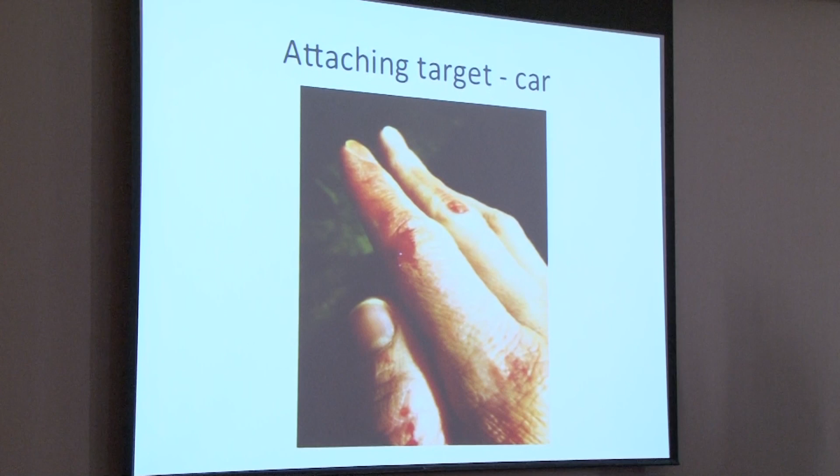Attaching to a target with regular software is just as easy as sipping drinks in a cabana in Las Vegas. Attaching to a car ends up being a bit harder, and you end up bleeding from your hands a lot, it seems. Yeah, especially us, because we're used to typing and not used to manual work. I'm not very good at mechanics work, so I was always busting my knuckles off bolts and bleeding everywhere all the time.

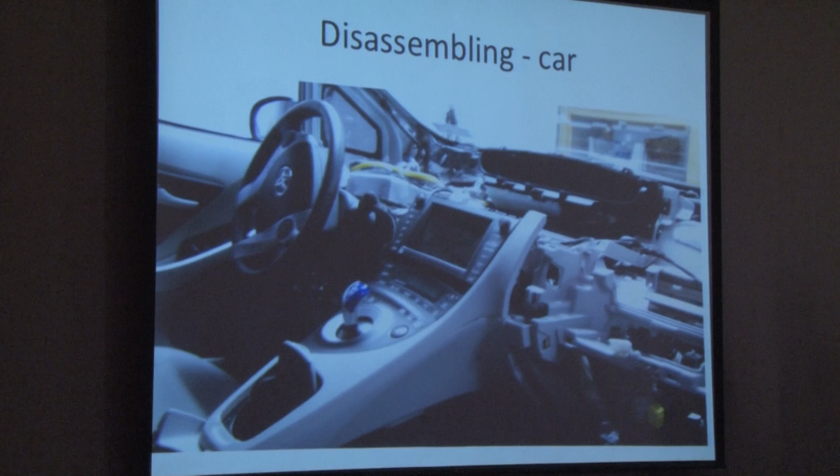Disassembly - there's probably a lot of people in this room familiar with reading disassemblies of computer programs. You're looking at code, you generally have an idea of where an entry point would be. Cars, on the other hand, require a bit more disassembly. We wanted to physically locate computers, so that involved ripping the car up. We both had accounts on mechanics websites for Ford and Toyota, respectively, and they would say things like here's 28 steps to remove the dashboard of the car. And I was like, crowbar, and just ripped it right off. Just pried it and ruined it because I didn't care. We weren't going to be using these cars when we were done, so we didn't really care if we damaged them.

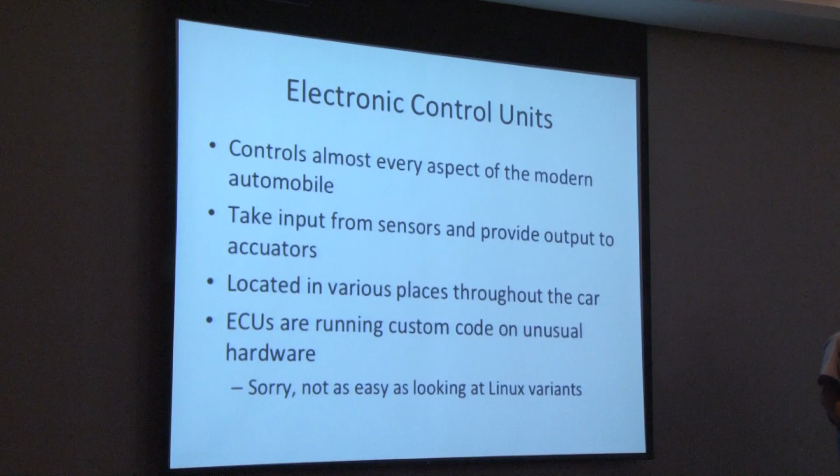The first thing I think we need to talk about are things called ECUs, or electronic control units. These little computers really tend to control every aspect of the automobile, from the odometer readings to acceleration to braking to sometimes steering. Auto manufacturers have realized that building these individual computers and putting them in the car and writing software to do what they want is a lot more cost effective than having all the wires and all the linkage and everything hooked up, right?

So they basically take input from sensors and then use things called actuators to perform physical actions, right? You could hear in Charlie's video when he was auto parking, you heard a beeping noise. That was a sensor saying he was getting close to the car behind him. And those are what these ECUs kind of do, and they're placed various places throughout the automobile.

Usually the first thing people ask is, what operating system are these things running? And they're really not running a traditional operating system. It's not just some Linux variant. They're running custom code on a specific chip that really doesn't have much functionality other than performing its job.

For example, there was an ECU in the Prius that was solely responsible for tightening the seatbelts in the case that you were to be in a collision. So imagine there's not much code on this device, right? Because all it does is get a signal, tighten the seatbelt. That's really all these things do. While the engine control is very sophisticated, there are ones for simple things.

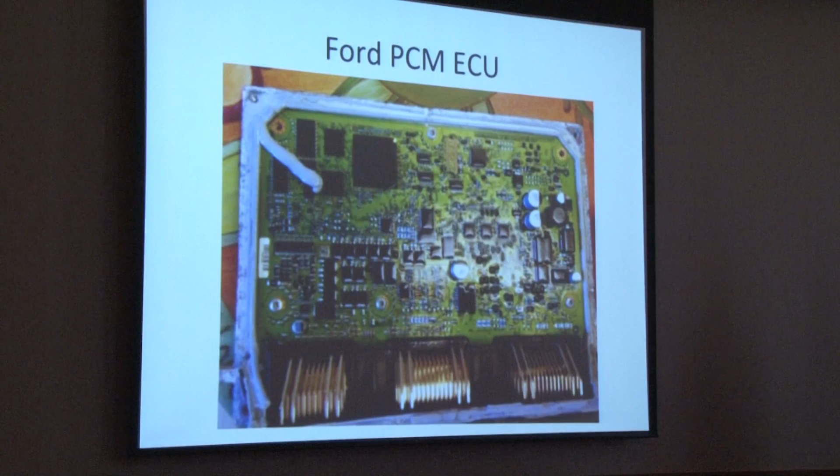Yeah, so if you want to see what one of these ECUs looks like, this is the powertrain control module for the Ford, basically the one that controls the engine. And so this is what it looks like under the hood. It's just like a ton of wires that go into it. If you rip it out, it looks like this. So you can see there's like a chip and like a bunch of memory and a bunch of other stuff. But yeah, it's just an embedded device basically that has a bunch of inputs, one of which is the CAN network.

So we were only interested in CAN. We're aware that there are other types of networks in automobiles, such as FlexRay and LIN and other things. So I think Ethernet is even becoming popular. But we wanted to look at CAN because we figured it was our best chance to see how the car's networks work. And CAN is generally in every car, at least in America.

The IDs can be 11 or 29 bits in length. We only saw 11-bit IDs on our car, and that seems to be the most common way. So instead of having an address, the ID is used kind of as a priority function, which the lower IDs are the greater priority. So the message with the highest priority in the car would be ID 0, and they contain varying amounts of data.

So really, there's no addressing. It kind of just spits this message out on the network, and the ECUs on the network look at the ID, and if it's an ID that they want as input, they take the message and digest the data that's available with it. So it's really quite simple.

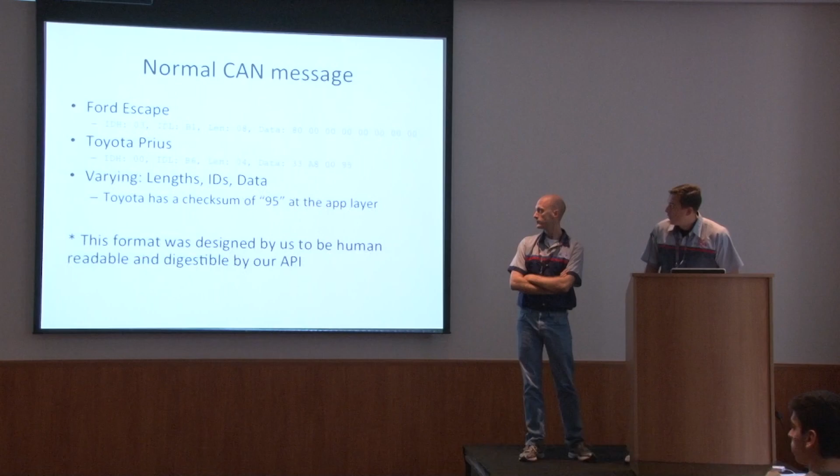These are example messages, the first being from the Ford Escape. This data format was invented by Charlie and I just to be human readable and digestible by our API. This isn't some standard definition. As you can see here, there's one message that has an ID, a combined ID of 03B1 and a length of 8, followed by 8 bytes of data.

While the Prius has another message, this one is 00B6 - I remember this one, it's for the speed of the automobile. It has a length of 4, and then 4 bytes of data. In the Toyota, it was very common for the last data byte to be a checksum. So that 95 is a checksum of the IDH plus IDL plus length plus the first 3 bytes of data.

So these messages are constantly being put out onto the network. They don't occur when something happens. The data bytes will change when certain events happen, but generally speaking, you'll see the message being spit out at a constant rate. And the 8 bytes is the most that a message can have - the 8 byte is the biggest.

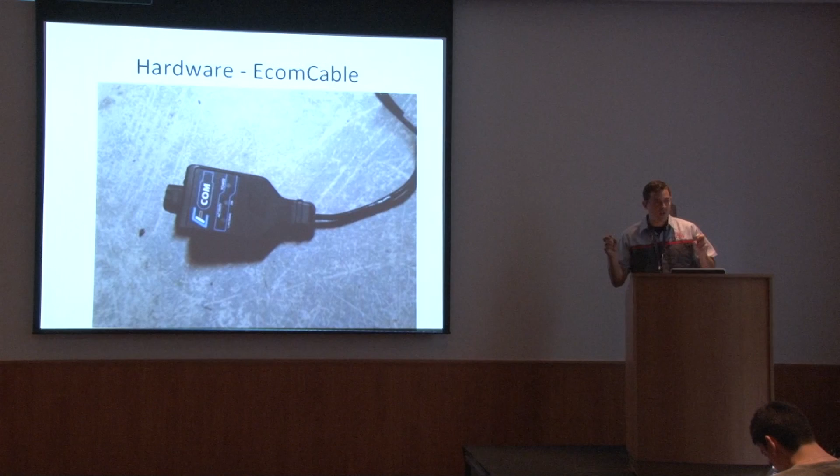The first thing we used is a thing called an ECOM cable. You can buy the regular cable for about $150 US, or a special Mechanics Edition for $1,200. We'd recommend not buying the Mechanics Edition, because if you look at the wiring diagram, you can snip a few wires, buy an OBD2 shell, and put the wires in the appropriate place, and it serves the same function. The expensive one just has exposed wires, and it also comes with software, which isn't as good as what we released. So save yourself some money—just buy a regular ECOM cable, look at the wiring diagram, and our paper explains how to snip the wires and connect them to an OBD2 shell.

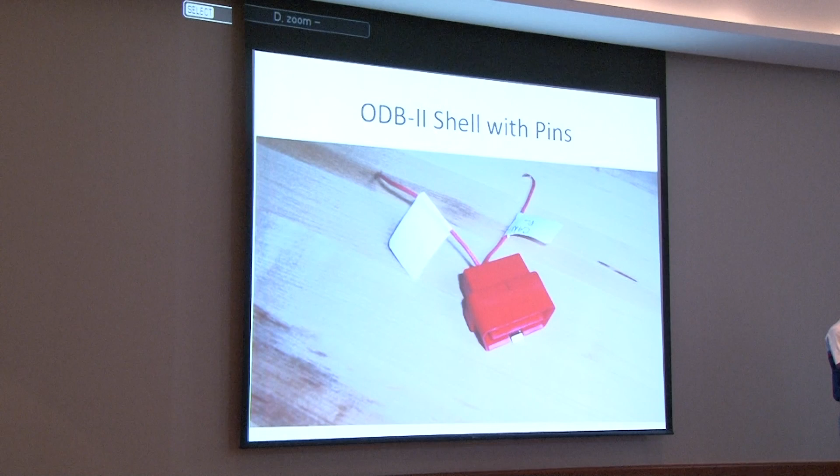If you're going to do this research, buy a lot of these—they're like 20 cents US. Basically, it's a blank shell for ODB2, and you can put metal pins where the pins are in your car. The standard pins are 6 and 14, but Charlie had pins for the Ford that were different, so he could create his own device instead of hacking up a whole big cable.

Since we showed you the hardware tools, now we'll explain the software that we wrote, which is now publicly available online. You can download it and use it yourself.

The first thing we really wrote was a tool called EcomCat. As you can probably guess, this was software that leverages the ECOM cable to read and write onto the CAN bus. It basically was our Swiss Army knife—we'd sit there and read messages on the wire, and built in functionality to send multiple messages, continuously loop messages, and filter on certain IDs. It's not very well written, I'd say, but it definitely serves the purpose and is very useful.

This is a tool we used when we wanted to figure out how parallel parking worked. Charlie and I would be out parallel parking our cars for hours on end, for a couple weeks, looking at our computer and using this software to narrow down the IDs used for the parking.

The other portion we wrote is the EcomAPI, which is basically a Python API that's quite useful and leverages a lot of the functionality of the Ecom program, which is written in C. This makes it really easy to write a 5-line script that performs some action. In our examples, we're actually using our own API to write little programs in Python to control pieces of the car.

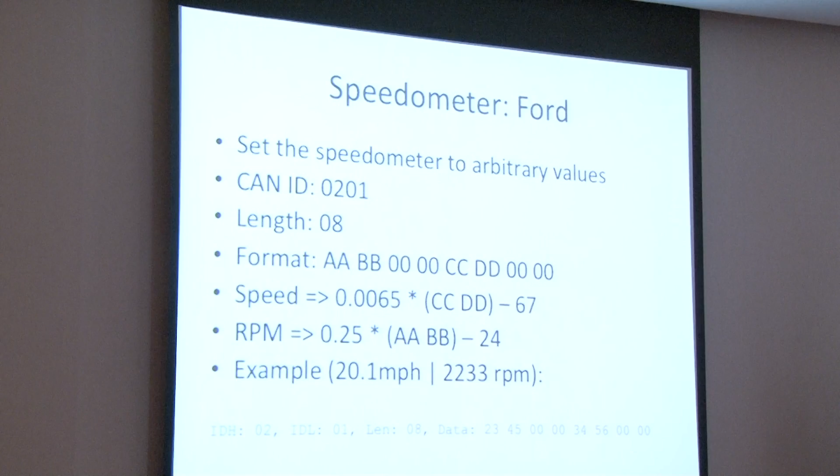So the first thing is, it's pretty simple, but people seem to think it's cool. You can control the speedometer on either car. So we'll start with the Ford one. Here, the ID you need to know is 0201. And the only way we figured that out, since that's not documented, was just trial and error. So it has 8 bytes. The format looks like this. You take your speed, you put it into that formula. You take the RPMs, plug that into the formula, and then you get the speedometer to say what you want. And if you want to see how easy it is, if you use our API, it's essentially 2 lines of Python to set the speedometer.

So here's a video. So I'm driving down the street. I'm driving quite slowly. It looks like 15 miles an hour or something. And then now it says I'm going quite fast. But I'm not actually driving quite fast. And this is obviously a closed course around Charlie's house. We're not endangering his neighbors. Yeah, this was very safe.

And then here's the same thing on the Toyota. For the Toyota, it's a different CAN ID, a different message, but it's the same idea. It's one message you play continuously. As you see, I'm sitting by my garage. I'm not moving at all. Yep, I'm definitely not moving. And then you can tell the car that it's going quite fast, 20 miles an hour, and you're not moving. So you can forge both these messages for the automobiles to trick the speedometer into thinking it's going any speed you want it to. And you'll see later why that's actually important for other types of things we wanted to do.

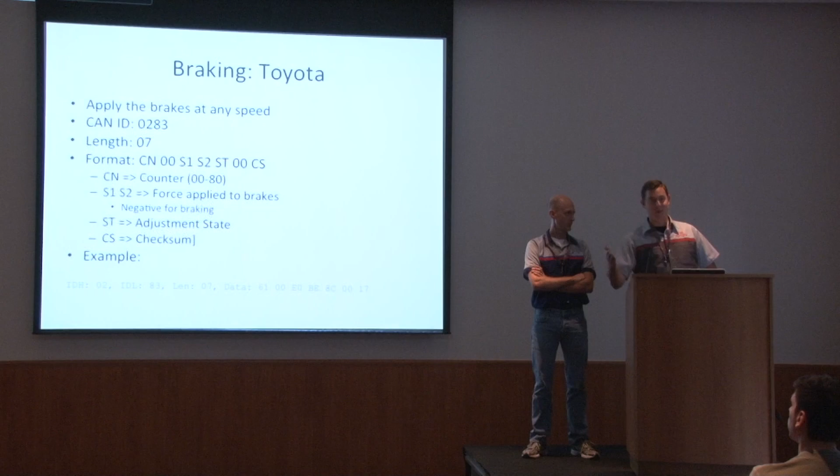For the Toyota, we wanted to be able to arbitrarily apply the brakes. And the way we did this, again, I would drive the car in cruise control really close to another car and have my sniffer hooked up, and I would see the car brake. I would record the traffic. We would sift through the messages and figure out which ones are used for automatic braking.

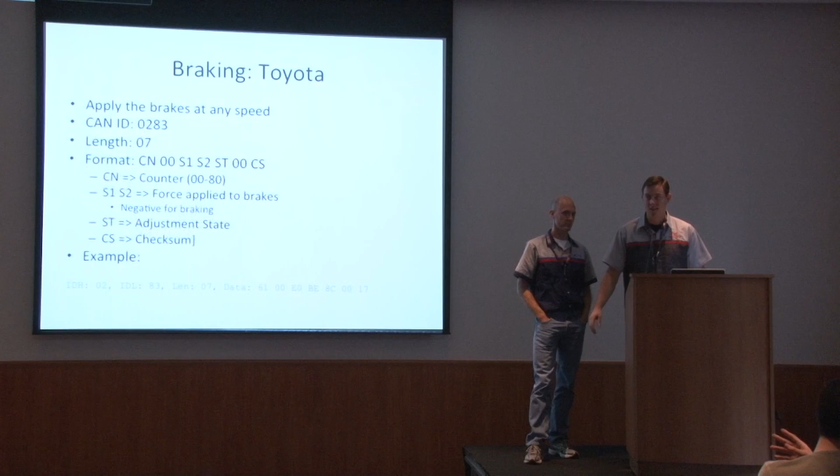Again, you kind of plug in how much force you want to apply to the brakes. Obviously we wanted to clamp them completely shut. And then there's a checksum, and then there's an adjustment state, which if you read the paper, it explains what that is.

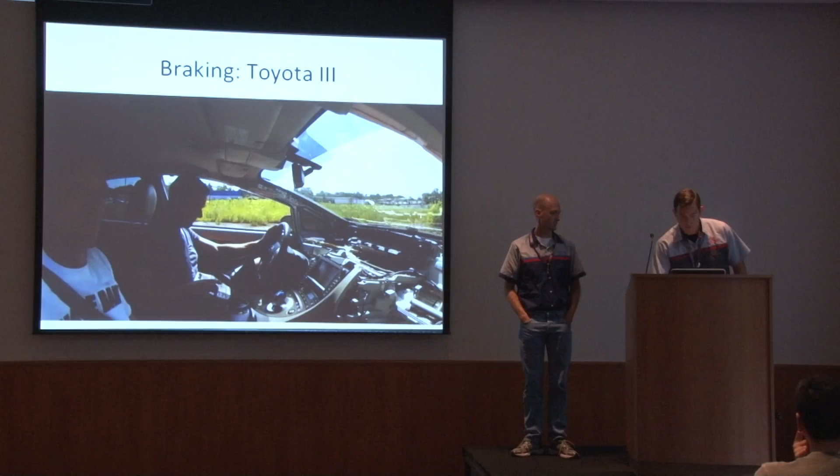Again, while this is a bunch, this is the whole program to completely lock the brakes of a 2010 Toyota Prius if it has the pre-collision system. The brakes will be applied at full force regardless of how fast you're going. You can even press the acceleration pedal the whole way down and the car won't move. So we have a video of that.

Okay. Where's the sound? Well, there's usually sound. Right, that's what it sounds like. So, yeah, that's what you generally would have heard. Let's watch it again. Okay. Did we get sound a second?

Yeah, there we go. So you can see we're driving like 40 miles an hour. I don't know what that is. And then we send the packet and we stop. That was pretty abrupt. All right.

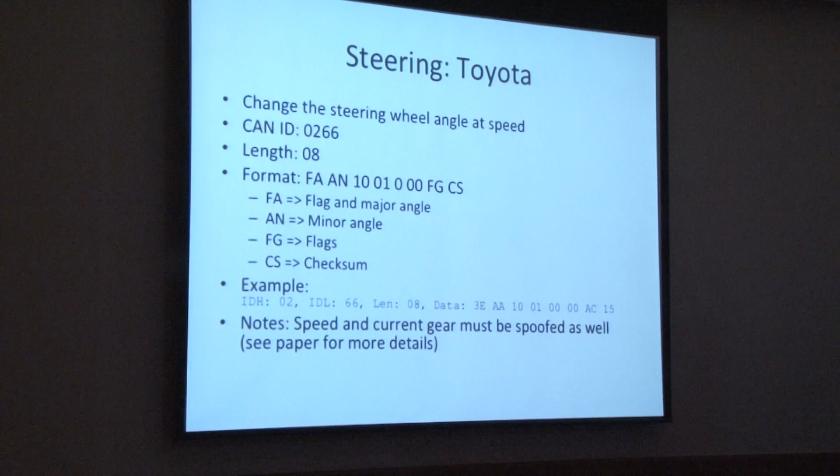Go ahead. For the Toyota, we could also control the steering. It had the lane keep assist, which was one way of controlling the steering, but it also had the intelligent park assist, parallel parking the car. Again, we just parallel parked the car with our sniffer hooked up, for hours on end trying to figure out what messages and what data corresponded to, say, the angle of the wheel, things like that. The Toyota actually had a lot of restrictions on when the wheel could turn if you were using the park assist.

You needed to be in the park assist mode, the car needed to be in reverse, and the car could not exceed more than 5 miles an hour. So at first it seemed pretty daunting, but what we did is figure out a way to trick the car. So before you saw how we set the speedometer to 20 miles an hour, this time around we gave the automotive network a speed that the car couldn't go, so no one knew what to do. From there, we told the car that it was actually in reverse when it wasn't, and that it was parallel parking itself. So by combining all the knowledge we learned about the car, we could make the wheel turn.

Again, as Charlie talked before, it's not really smooth like it would be if you were parking the car, but it really jerks the wheel out of your hands and you can definitely wreck. We just wrecked someone giving a demo last week. So yeah, there were 2 ways in the Toyota that you could turn. You could do the lane keep assist, and the safety built in there was you could only turn 5 degrees. So that's not very fun. No. And then the safety for the parallel parking was it only worked if you were slow and in reverse, and that wasn't fun. But by tricking that, we were able to get the turn.

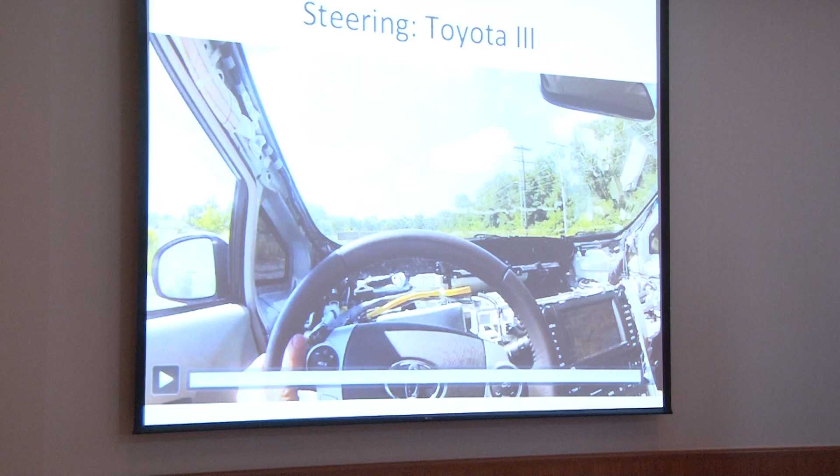So here's us driving again. So Chris is going to make the steering wheel turn to the left. So it did a little bit there, but there it did quite a bit. I was literally trying to kill Charlie the entire time. It's quite scary. So here's like if you're driving what it would look like. We almost hit a little tree on the side of the road. It always seems to turn when it senses you're going to crash. Yeah, it's really weird. Yeah. But as you see, we didn't really have full control, unfortunately, but it's definitely enough to wreck you.

Acceleration was another one of our goals, and the Prius actually had acceleration by wire. That is, it communicated on the CAN bus to a certain ECU, and that ECU kind of controlled the speed of the car. While in Charlie's car, it really didn't work that way. Again, we figured out the CAN ID that was used for acceleration. Unfortunately, for this example, we couldn't be in the OBD2 port. We actually had to connect into another place in the CAN network, but we figured if you're going to compromise a car, you're probably going to get multiple entry points after you've gained your initial entry point. So it's still feasible, and it showed that we could control acceleration of the automobile.

Again, this is the whole program. As long as you're jacked into the CAN network in the right spot, these couple of lines will accelerate the automobile. The Prius is a hybrid synergy drive, so the gasoline engine isn't always doing all the work. The electric motor will help the car out. So this really only works when the internal combustion engine is engaged and will end up making the car go forward. You let off the gas pedal and you send these messages and the car continues to accelerate.

Warning, this can and will harm your car. If this was my personal car, I wouldn't have done any of this work, but specifically, I would have not done this because we did blow up an inverter. It cost us $4,000 USD to fix and took a lot of budget out of our project.

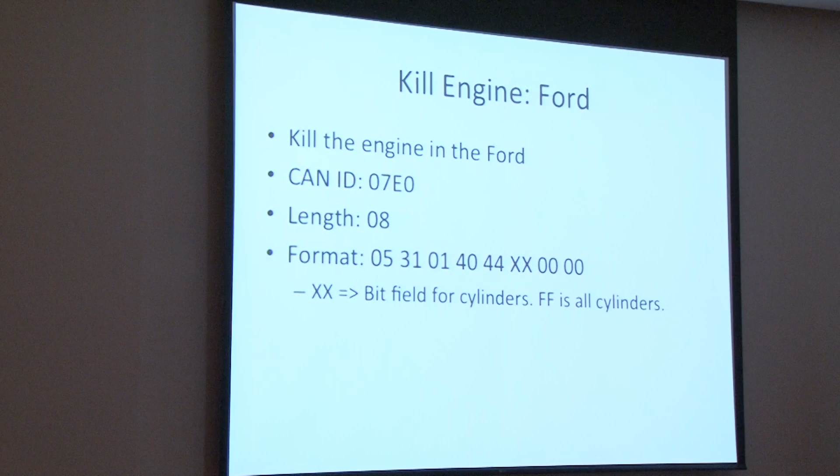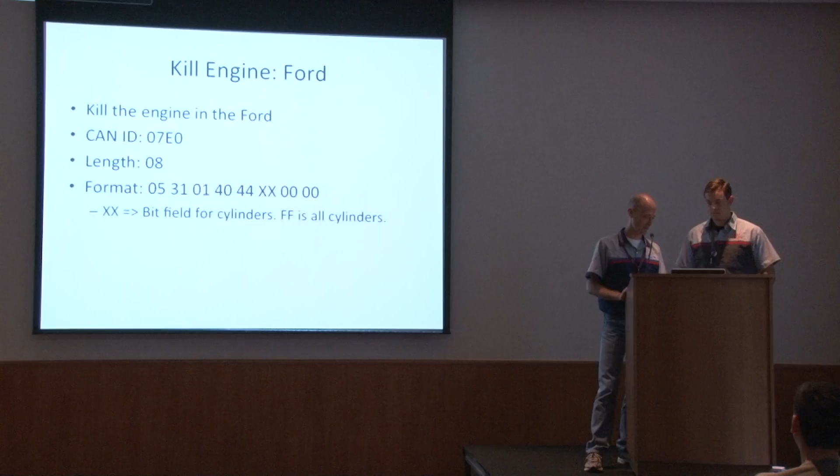So here's one example. It turns out there's lots of ways to denial-of-service the car with the CAN bus. You can make the car not work or do anything. It's actually very easy to do. In this case, you just send this message and the car will die. The engine will die and you won't be able to start it as long as you send this message. So here's that video - I'm driving, you can hear the gas, and then you hear it stop.

And then I'm trying to start the car, and I'm rolling backwards. Did you kill the engine? That's my cameraman, son. Yeah. So anyway, no matter what you do, you're out of luck at this point.

We can do things like turn the lights on and off for the Toyota. They usually have to be in the auto state, which a lot of people keep it on, so when it gets dark the lights automatically turn on - you have your daytime running lights. We wanted to do a demo, but unfortunately I planned to do this demo after we blew up the car, so I never got to do a demo of this, but you can turn the lights on and off in the Prius.

Same thing in the Ford - you can turn the lights off, and this one is especially scary because not only can you turn off the headlights, you can turn off the brake lights. So even when you press the brake, the lights don't turn on. It's just completely dark. Here's a video, I think.

I'm about to DOS this time. So I send the packets, and the interior lights are on there and the speedometer, but the outside lights are off, and the air conditioner doesn't work, the radio doesn't work. You'll see I open the door, but the dome lights don't come on. I'm pressing the button, and none of the lights are on, including the brakes. So it's sort of a bummer.

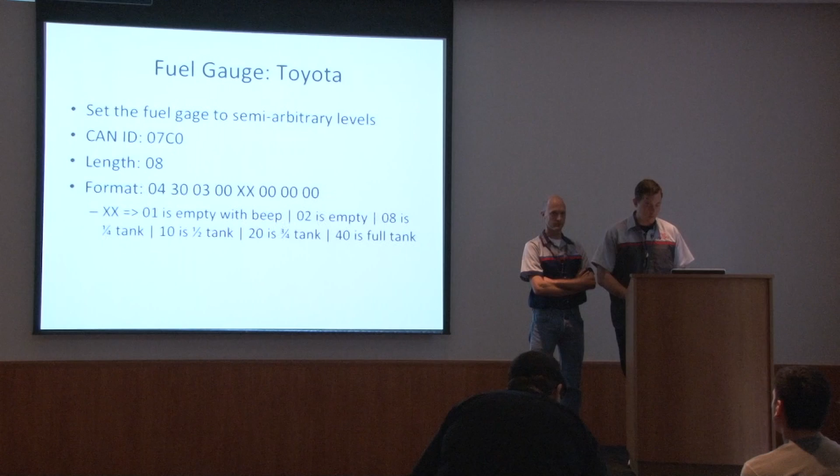Fuel gauge - even the fuel gauge is reliant on things such as the CAN bus. Even though it measures how much fuel is in there, you can test the gauges with diagnostic tools, right? So if you watch the video, I can pretend that we have a full tank, and that even works - you can say that you have a full tank of gas.

While you're driving - I'm looking for a friend with a Prius because I want to get one of these little plugs that constantly plays the message that he has a full tank of gas, so he just breaks down, and I can laugh at him.

So here is the thing that made me crash my car into the garage. It's probably one of the scarier things. It's a command that a mechanic would use to bleed the brakes, like let the air out. So they did build precaution, like security, into it. It only works if you're driving around 5 miles an hour or less. So that means if you're driving 40, the brakes still work. But the problem with that feature is that if you want to use your brakes, at some point you want to actually stop, so you always want to eventually go less than 5 miles an hour. And so you can't stop.

So here is a video of me doing it to Chris for a change. He's going to go park the car, and then I'm going to make the brakes not work when he goes to move.

I found a spot. All right. So that noise is the brakes bleeding. We're driving into the weeds and stuff. I was panicked enough to try to use my left foot to press the brake pedal, I don't know why. You see we hit the curb and go up, and then we're driving into the weeds. The only reason he ever stopped, when he was mashing the brakes with his foot, he actually knocked the cable out. Otherwise I would have made him drive until he hit something.